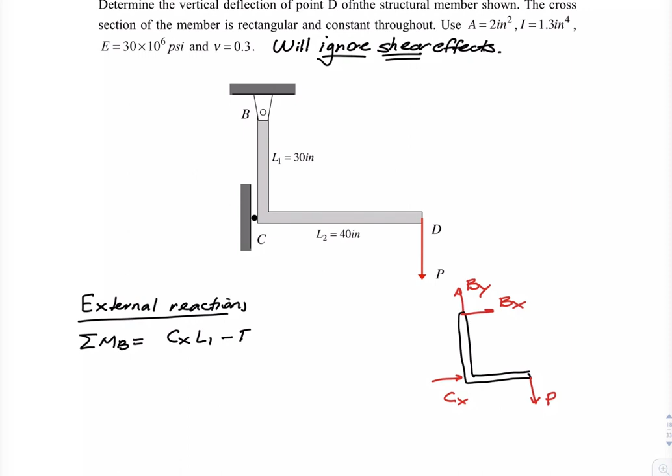What I'm going to do is a summation of moments about B. Summation of moments about B gives me CX times L1, minus the load P times the length L2. So CX is equal to L2 divided by L1 times P, and for the dimensions provided, that's 4/3 P.

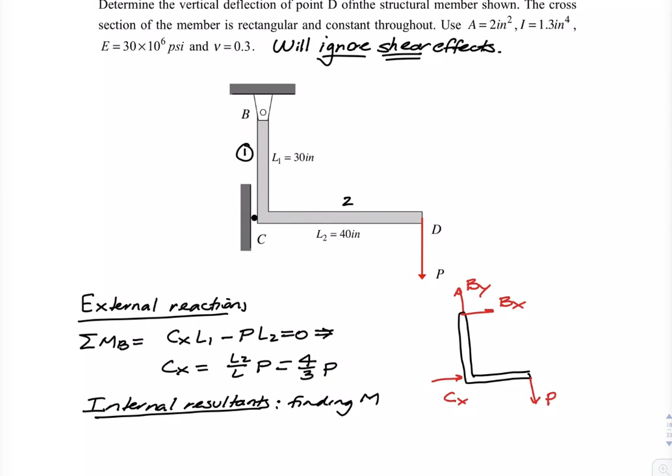The next thing we need to do is find our internal resultants. Since we're not including shear effects, effectively what we're doing is finding the internal bending moments M. I'm going to break the structure mathematically into two parts: one, the vertical piece, and two, the horizontal piece. In the end, whenever I write down my strain energy, I'll write it down for one and for two, and then add them together.

So for one, what I need to do is make a mathematical cut through the member somewhere in section 1. What I'm going to do is make the cut in section 1 and keep the lower right part. The reason for this is I didn't bother to find BX and BY, so by doing it this way, I can avoid finding those.

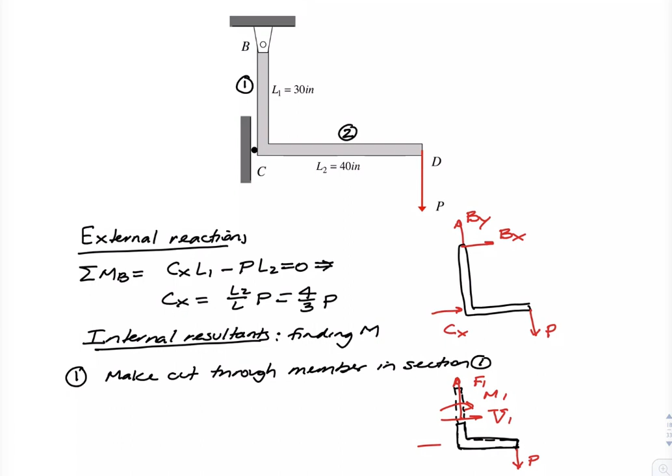I'm going to have a shear force V1, a bending moment M1, an axial load F1, and of course my reaction at C, which I found through equilibrium.

First I will sum forces in Y, using Y positive up, X positive to the right. There what I get is F1 minus P. With that equal to 0, the axial force F1 as a function of the variable along 1, which I'll call Y, gives F1 of Y equal to a constant, P.

If I sum moments about the point where I made the cut, let's call that K, what I have is minus M1, plus CX times the moment arm Y, plus P times the moment arm L2, in the minus Z direction. For equilibrium, that's equal to 0. So M1 as a function of Y is equal to 4/3 Y minus the length L2, times the applied load P. So that's what I have for section 1.

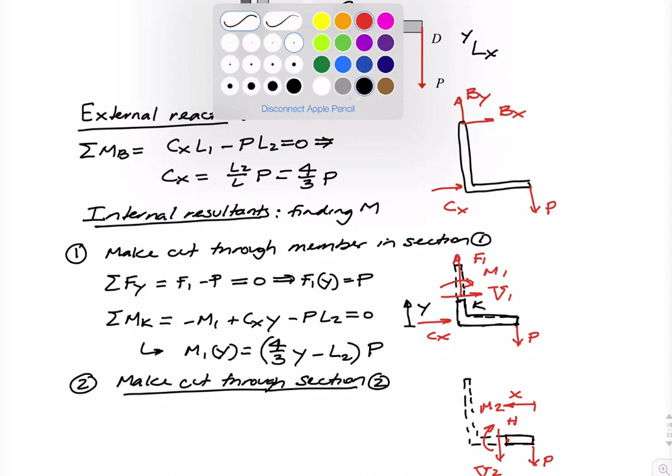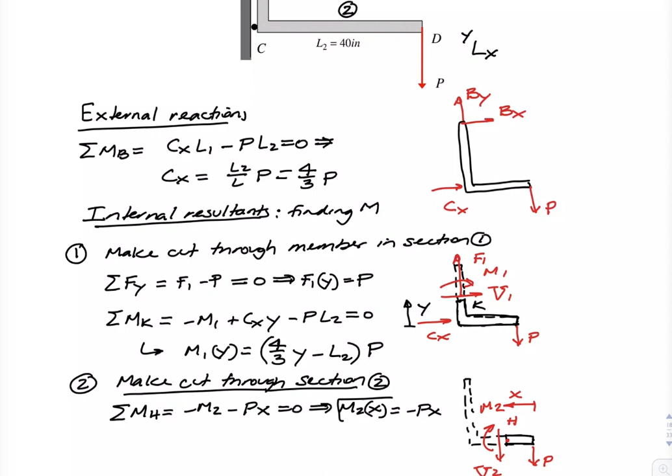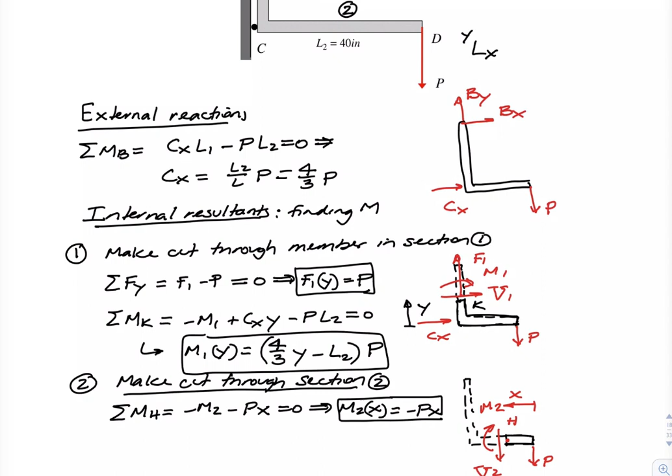When I sum my moments about H, what I have is minus M2 minus P times X. So equilibrium gives us that the bending moment M2 is equal to minus PX. This is what I'm going to use for section 2, and this is what I'll use for section 1 for bending, and the axial force for member 1. So I've got all the pieces I need.

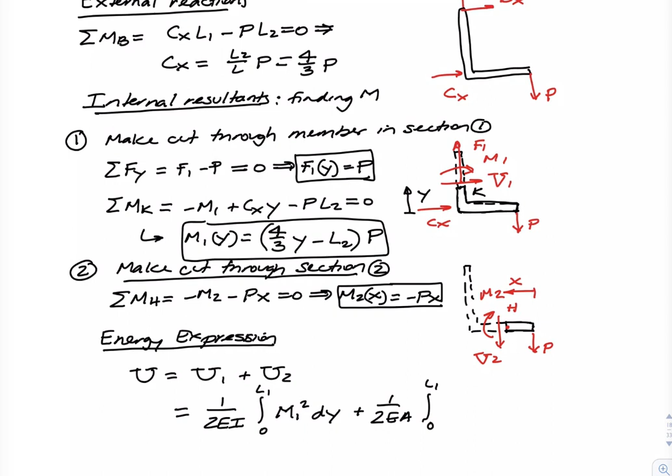Whenever I write down my energy expression, U is going to be made up of what comes from 1 added to what comes from 2. From section 1, I'm going to have 1 over 2EI, integral from 0 to L1 of M1 squared dy, plus 1 over 2EA, integral 0 to L1 of F1 squared dy. Then for 2, I'm going to have 1 over 2EI, integral 0 to L2 of M2 squared dx. This is for section 2, and this is for section 1.

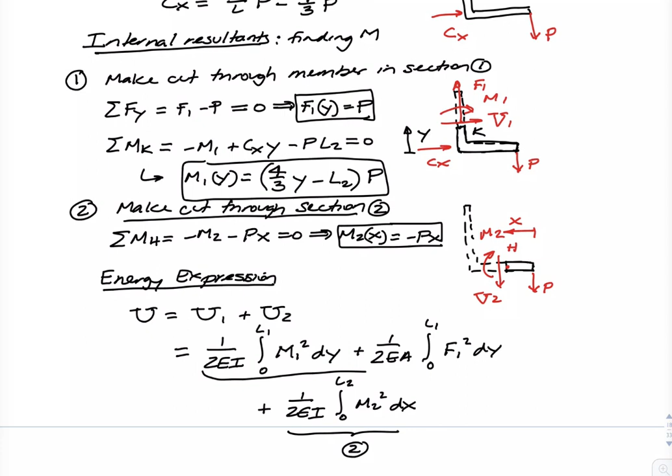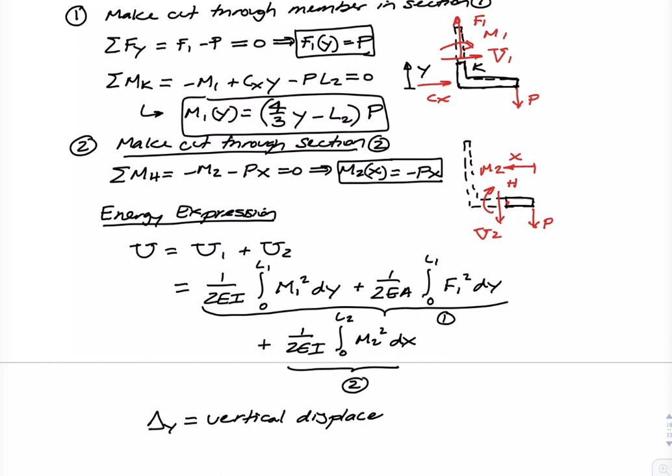What I want to do is find the vertical component of displacement at D. Using Castigliano, I'm going to do a partial of my expression U with respect to P.

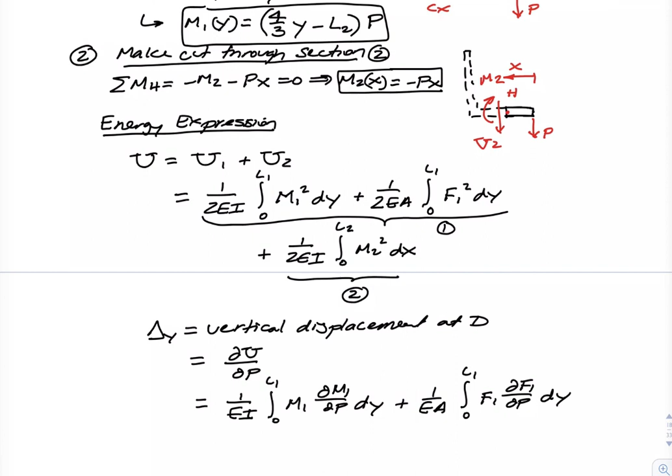I do the differentiation, and I get 1 over EI, integral 0 to L1, M1 times partial M1 with respect to P, dy, plus 1 over EA, integral 0 to L1, F1 times partial F1 with respect to P, dy, plus 1 over EI, integral 0 to L2, M2 times partial M2 with respect to P, dx.

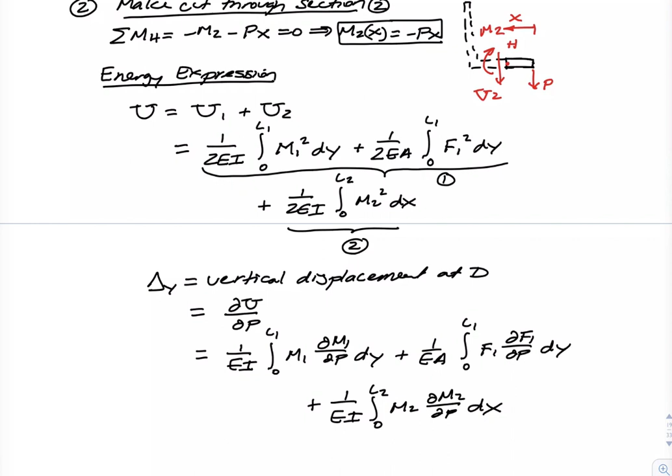So what I have here, whenever I put in M1, I look back at my expression for M1, and that's 4/3 times Y minus L2, squared, dy, with a factor of P which I brought out on the outside.

I have 1 over EA, integral 0 to L1. F1 we saw was equal to P. Partial F with respect to P is just 1.

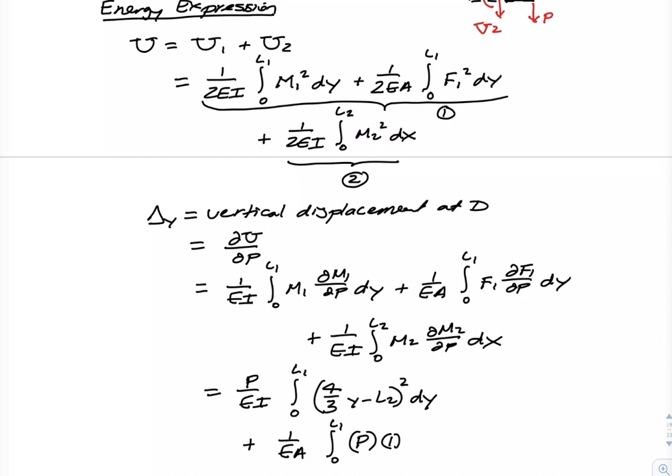And the last term is 1 over EI, integral 0 to L2. M2 was given by minus PX. Partial of M2 with respect to P is minus X. So this is going to be a positive P X squared dx, and this P can come on the outside.

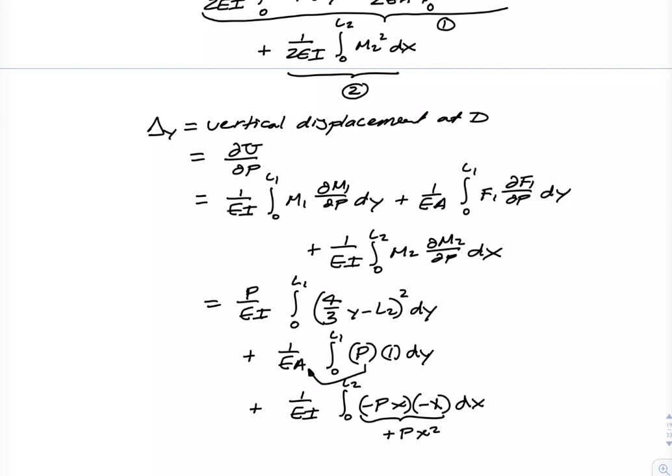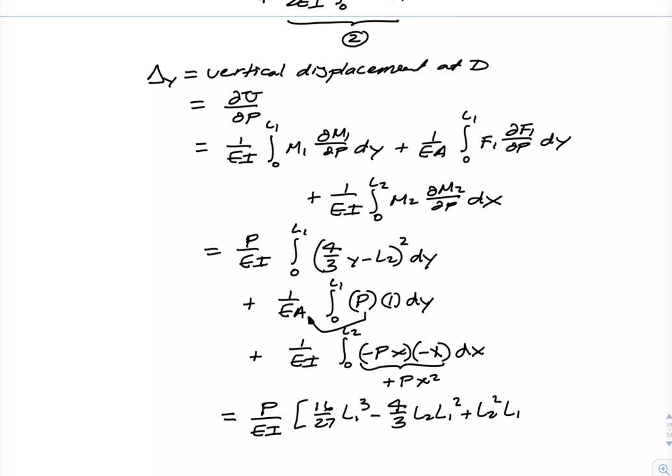By the time I do my expansion of the first term, doing the square and the integration, what I end up with is P over EI times 16/27 L1 cubed, minus 4/3 L2 L1 squared, plus L2 squared L1, plus P L1 divided by EA.

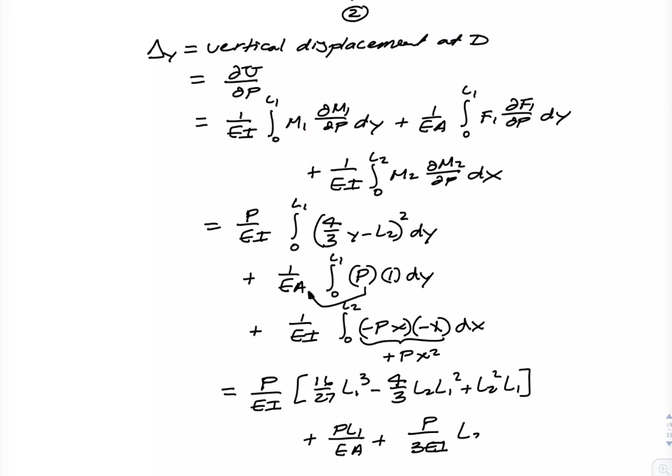Plus P over 3EI times L2 cubed. So this is going to be the deflection in the Y direction at D.